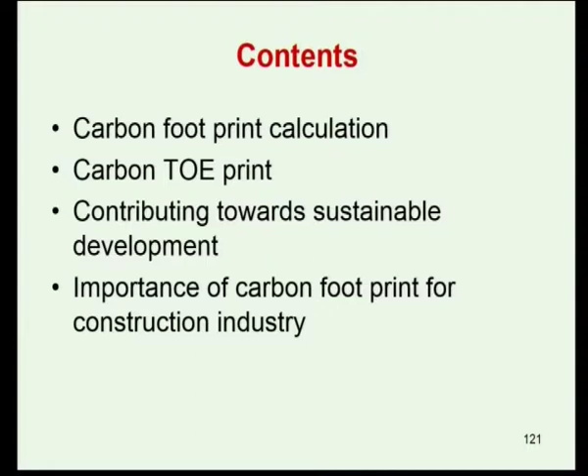The contents we are going to discuss are the following: carbon footprint calculation, how to calculate the carbon footprint; second, carbon toe print; third, contributing towards sustainable development; fourth, importance of carbon footprint, especially for the construction industry.

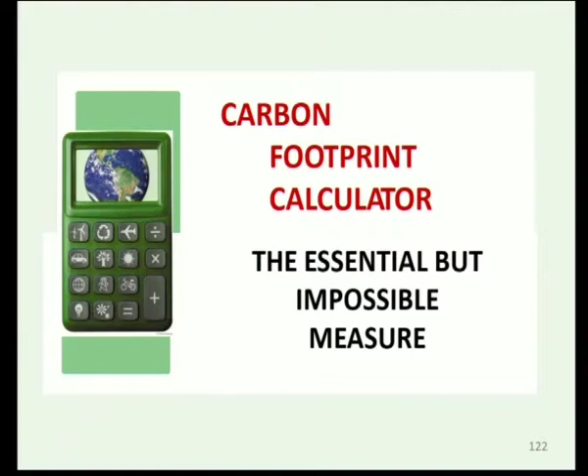The carbon footprint calculator is a very essential one, but it is not so easy to measure. We have to take into consideration several factors. The basic steps for calculating the carbon footprint for any organization: first and foremost, you have to establish the assessment boundaries - what boundary, or within that boundary, which building we are going to calculate the carbon footprint for. That is the first step.

Secondly, organizational and operational sources for the greenhouse gases. What are the various organizational factors which contribute to greenhouse gases, and the various operational factors which contribute to greenhouse gases - you have to list them out. Then thirdly, after listing, you have to collect the various data in connection with the organizational and operational factors.

Then the next step is calculation of emissions using appropriate emission factors, which are already available. Through that, we calculate the emissions using that factor. This has already been given in the standards for life cycle analysis, ISO 14044 and ISO 14040.

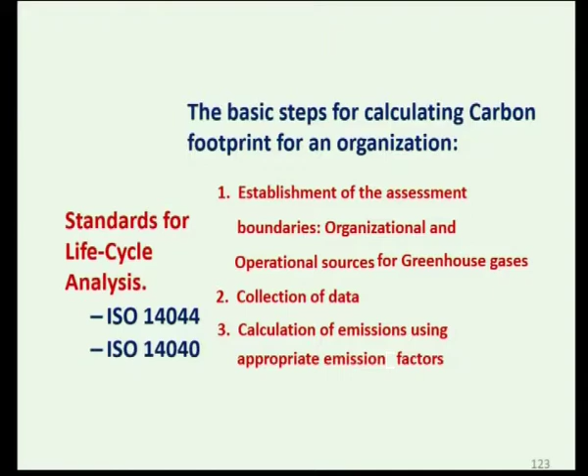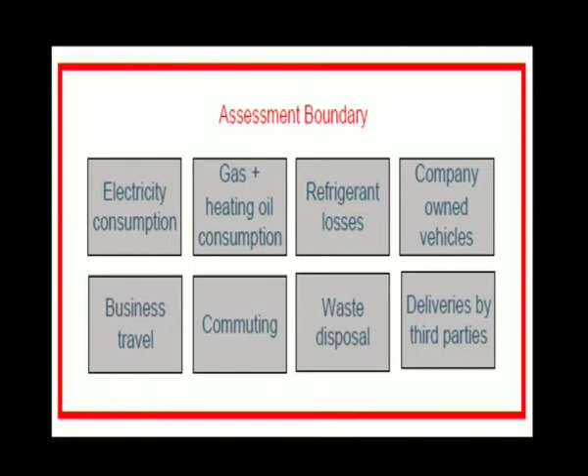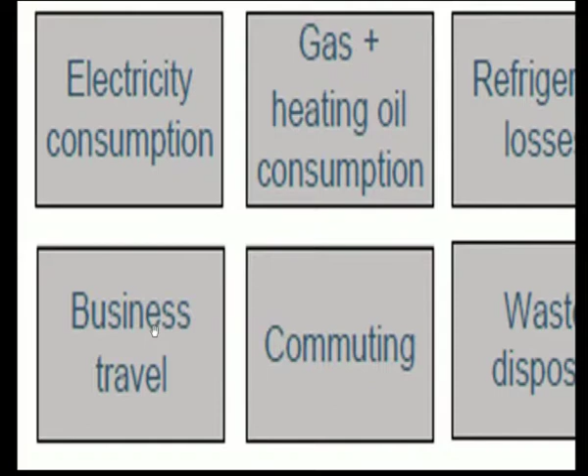So, in my previous slide, I spoke of the assessment of the boundaries. The assessment boundaries are the following: first, electricity consumption; then gas plus heating oil consumption; third, refrigerant losses; then company owned vehicles; then business travel, commuting, waste disposal, and delivery by third parties.

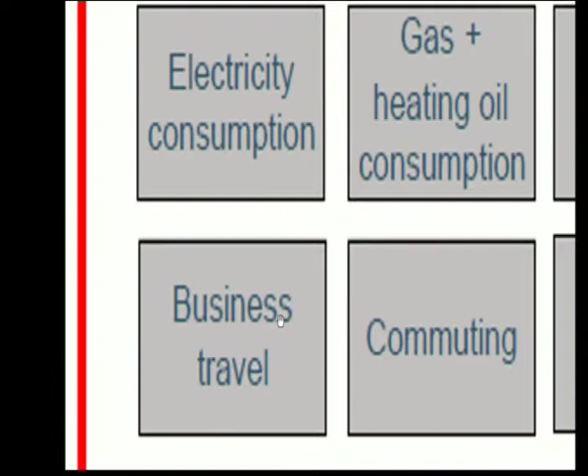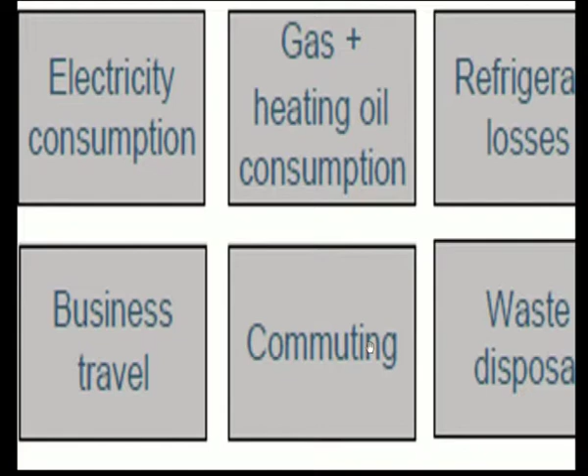Here, business travel refers to people coming to that industry for the purpose of various business. Commuting refers to employees who regularly come and go, which falls under this category. Of course, we know waste disposal, and then deliveries by third parties.

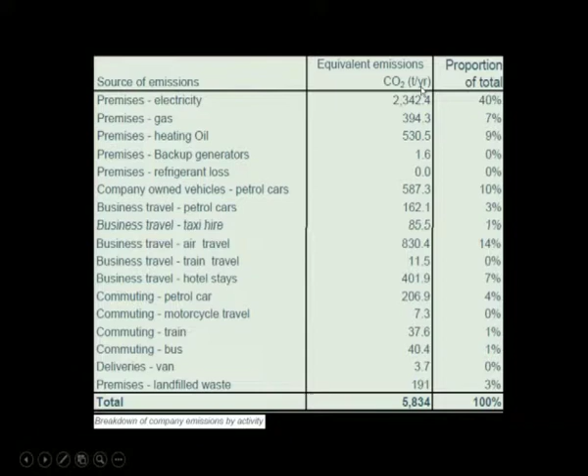This carbon footprint breakdown for a business with 5 offices shows the major contributor is premises, at around 59%, then company owned vehicles around 10%, business travel around 20%, commuting around 5%, and deliveries.

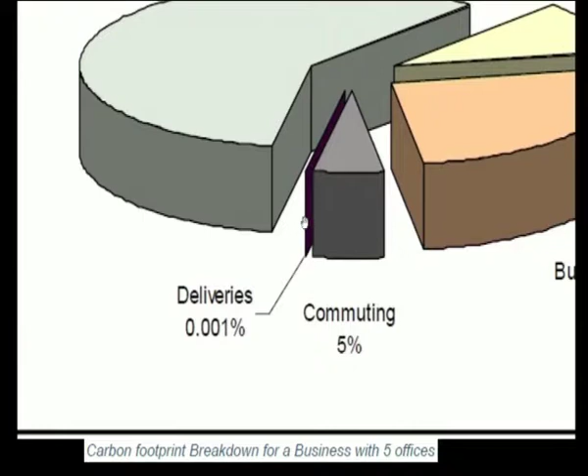Now you have to beware of carbon toe print. You should not get confused between carbon footprint and carbon toe print. What is a carbon toe print?

For example, a magazine publisher might claim to have measured its carbon footprint, but in doing so, he looked only at his office and cars, while ignoring the much greater emissions caused by the printing house that produces the magazine. In calculating the carbon footprint, he was only taking the activities inside the office and the cars, the transportation factors, but not taking into consideration the factors caused during the printing of the magazines.

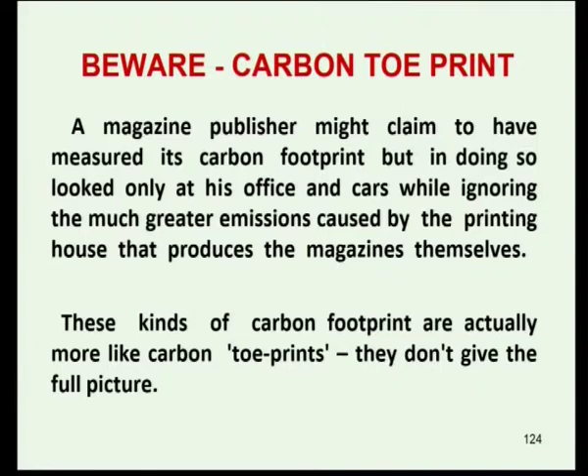This is what is called a carbon toe print. These kinds of carbon footprints are actually more like carbon toe prints. They don't give the full picture.

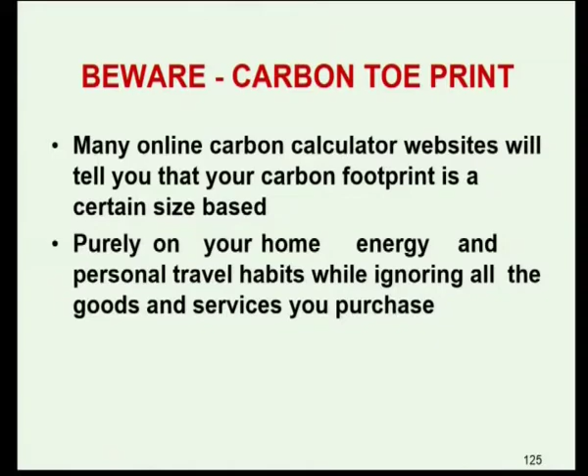Many online carbon calculator websites will tell you that your carbon footprint is a certain size based purely on your home energy and personal travel habits, while ignoring all the goods and services you purchase. So when calculating it, you should take these two factors into consideration as well, namely the goods and services which you are purchasing.

Much of the confusion around footprints comes down to the distinction between direct and indirect emissions. Direct emissions can be calculated very easily, but indirect emissions we have to assume and take several other factors into consideration.

The true carbon footprint of a plastic toy, for an industry manufacturing the toy, includes not only the direct emissions resulting from the manufacturing process. In the course of manufacturing, several factors contribute to carbon, and those can be listed out easily. But beyond the manufacturing process and the transportation of the toy to the shop, it includes a whole host of indirect emissions, such as those caused by the extraction and processing of the oil used to make the plastic in the first place.

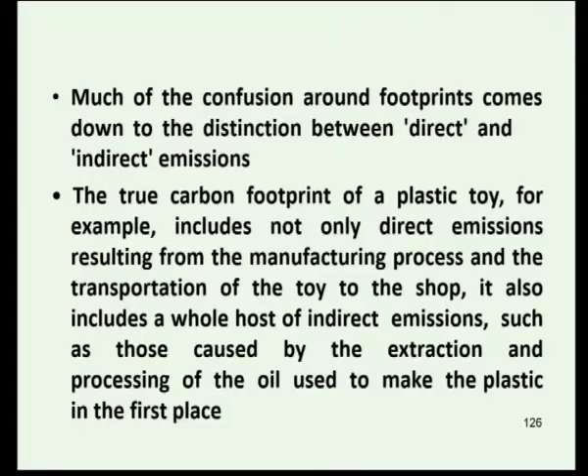To explain it very easily, it is nothing but a life cycle analysis. That is, in working it out, you account for all the various factors and find out, from the beginning to the end of the process, what quantum of emissions it is emitting. From that, you can very easily calculate the carbon footprint.

Then, contributing towards sustainable development. The definition of sustainable development is development which takes into consideration the present, without affecting the ability of the future generation, or development that must be within the carrying capacity of the environment.

What are the various factors contributing towards sustainable development? First, it helps identify low carbon project options that have the potential to make carbon savings during the design and construction phases. So first, we have to identify the various potential sources for carbon savings during the designing of the building and during the construction phase.

Second, carbon savings during a building's operational lifespan by promoting building energy efficiency and the use of renewable sources of energy. So whenever possible, we must try to go for renewable energy sources.

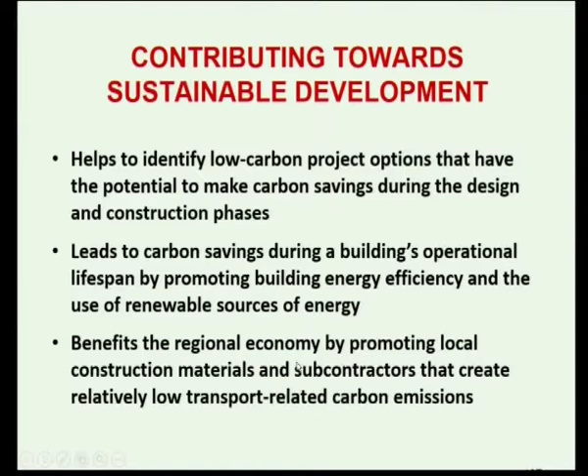Third, it benefits the regional economy. How does it benefit the regional economy? By promoting local construction materials and subcontractors that create relatively low transport related carbon emissions. When you are able to employ regional materials, or materials available in the vicinity, you can reduce a good amount of cost in transportation of materials. Secondly, you can employ local contractors. With all these, you can reduce carbon emissions.

Carbon conscious buildings should be designed according to sustainable urban planning in order to help reduce their lifetime carbon emissions. The results from a project's carbon footprint can also be used to benchmark performance and realize carbon reductions on similar projects in future.

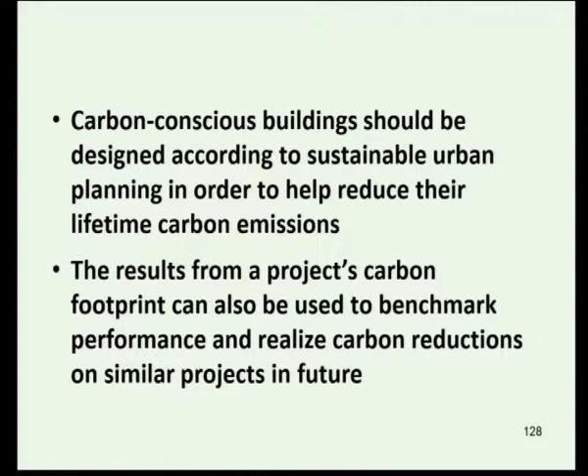Importance of carbon footprinting for the construction industry. We will see the social aspects and economic aspects, how it benefits.

First, with reference to the social aspects: project partner collaboration. Carbon footprinting involves close collaboration with the project clients, subcontractors, supply chain, and building occupants. You can see how close collaboration exists between the client, contractors, and a continuous picture of the supply chain management.

Secondly, it raises the knowledge and awareness of climate and sustainability issues within the project team, client, building occupants, and among the public in general. If you can build this kind of good knowledge and awareness between the team, client, and building occupants, and even among the public, you can get good project partner collaboration. This paves the way for the social aspects, and as a result you can reduce the carbon footprinting in the construction industry.

The next social aspect: construction produces long life buildings. Buildings must exist for at least more than 50 years, so accordingly we must plan and execute the project. This promotes long life buildings, as relatively longer lifespan design options may have smaller carbon footprints over their extended life. As the life is extended, there will be relatively a smaller carbon footprint it must leave. Only then can the building be considered a good building with reference to less carbon footprint.

Let us move to urban planning. In the case of sustainable urban planning, first and foremost, carbon conscious buildings should be designed according to sustainable urban planning. So when you are planning the urban area itself, you should plan buildings which are more carbon conscious, meaning these buildings must release less emissions and leave less carbon footprint.

Second, being located close to amenities and public transport provisions in order to avoid transport related carbon emissions during the building lifespan. In the process of building construction, as well as after the building is occupied, it should have all amenities close to its vicinity. As a result, we can provide better transport provisions so that we can avoid transport related carbon emissions during the building's lifespan, leaving a lesser amount of carbon footprint.

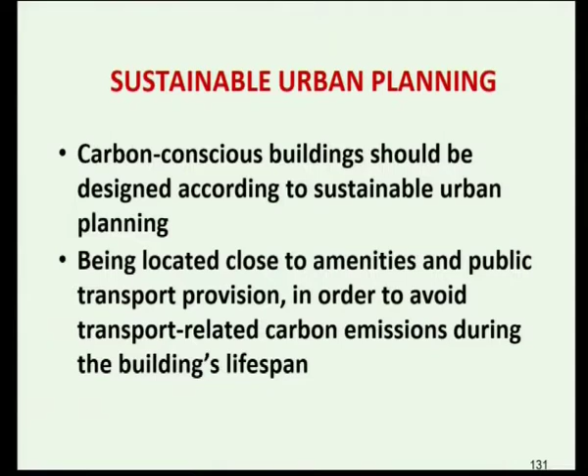Let us move to the economic aspects. It helps to identify regionally sourced materials that may have lower transport related emissions. Second, since we are using locally available materials, it will benefit the local economy.

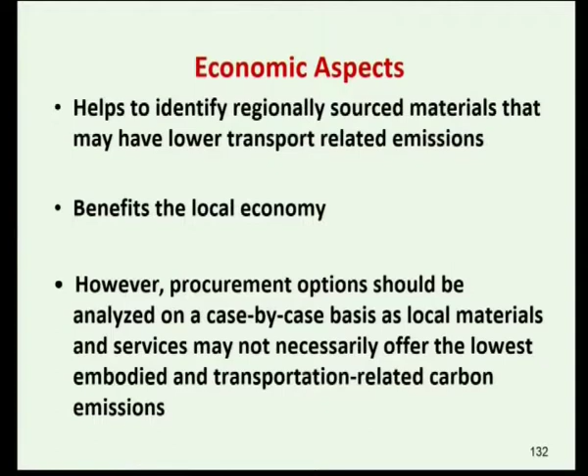Third, procurement options should be analyzed on a case by case basis, as local materials and services may not necessarily offer the lowest embodied and transportation related carbon emissions. So first and foremost, we have to give priority to the local option, but that does not mean local alone is supposed to be the good one. We have to analyze case by case, and wherever we can find lower emissions, that thing we have to give top priority.

Next, financial savings from reduced operational carbon emissions. Automatically, when the carbon emissions are reduced, it will save a good amount of finance, and as a result we can get more economic benefit.

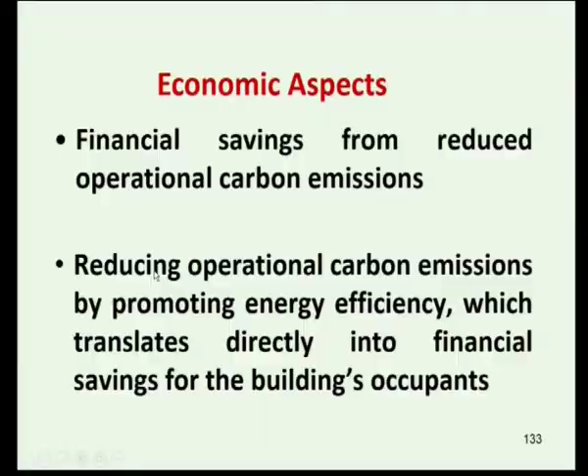Reducing operational carbon emissions by promoting energy efficiency translates directly into financial savings for the building's occupants. Whatever operational cost we are reducing in the carbon emission process will definitely benefit the building occupants financially.

Promoting cost efficient low carbon buildings: carbon footprinting techniques analyses can incorporate cost estimation, which can compare both economic and environmental cost and promote the delivery of cost efficient green buildings. Here, whatever environmental cost is directly involved, we can work it out.

Then secondly, whatever environmental cost is involved indirectly, we calculate that environmental cost converted into economic cost, then add these two together. As a result, you can get a total picture of the financial benefit you are getting. If that picture shows less carbon footprint, less emissions, and more energy efficiency, then that building can be considered a green building, or a cost efficient and cost effective green building.

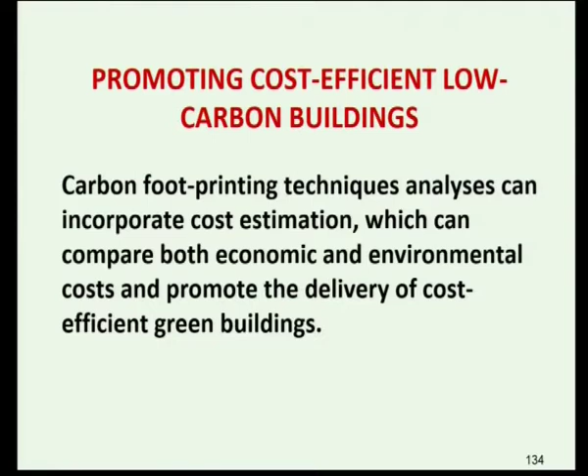Reducing environmental impact during construction: a building's carbon footprint includes carbon emissions related to the construction process. In the process of construction, there are lots of activities which take place, and those activities lead to emissions that include carbon, and that again contributes to the carbon footprint.

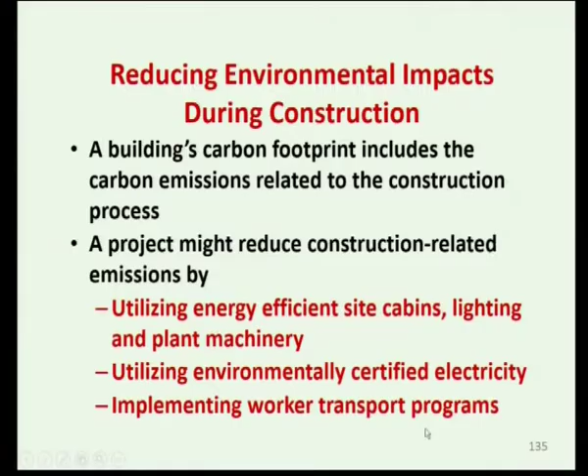In the process of construction, a project might reduce construction-related emissions. How? By utilizing energy efficient site cabins, lighting and plant machinery, utilizing environmentally certified electricity, and implementing worker transport programs. All these things reduce the carbon footprint or emissions during the process of construction.

Waste management is the most important. You have to find out what is the quantum of waste it generates, what are the characteristics of the waste, and how the waste can be minimized. And whatever waste is generated, which is unavoidable, we have to plan whether it can be recycled or reused, so that waste minimization happens.

Instead of going for end-of-pipe treatment, you have to integrate a process to reduce waste at the source itself, and wherever possible, manage and recycle the waste itself. Carbon footprinting can help calculate the life cycle carbon emissions from waste materials based on whether they were reused, recycled, incinerated or sent to landfill.

Footprinting can also help calculate the life cycle carbon emissions from the waste material. So we have to take into consideration whatever waste material is released, how you are going to treat it, reuse it, recycle it, whether you send it for incineration or landfill - you have to work out the life cycle carbon emissions from that, and take this factor into consideration.

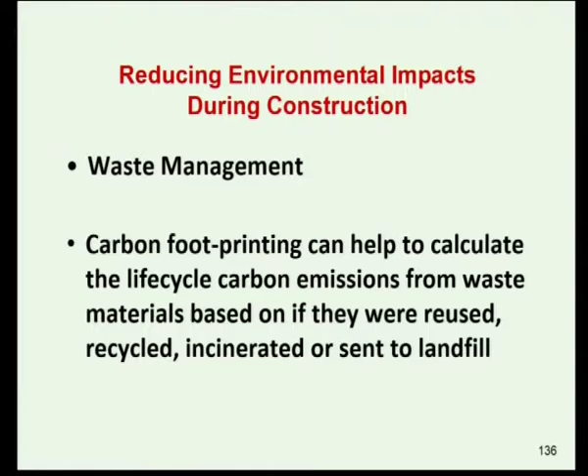Reducing environmental impact during construction: whenever we talk about environmental impact, we consider the construction phase and the operational phase. During the process of construction, first the waste streams, if effectively monitored, can help reduce emissions and reduce the carbon footprint.

Carbon mitigation efforts on future projects should focus on reducing the waste of materials - meaning wherever and whenever waste can be minimized, or how materials can be effectively used. Whatever waste is generated must be recycled as much as possible. On one hand reducing waste, on the other hand recycling the same waste, so we can reduce emissions to a large extent. This will also save energy and reduce the carbon footprint.

Operational energy efficiency means that in the process of operating a building, wherever possible, we have to use energy efficient sources. This includes not only non-renewable sources but renewable ones too, or we can move to alternative sources of energy. As a result, when efficiency is increased, it can significantly reduce the building's total carbon footprint.

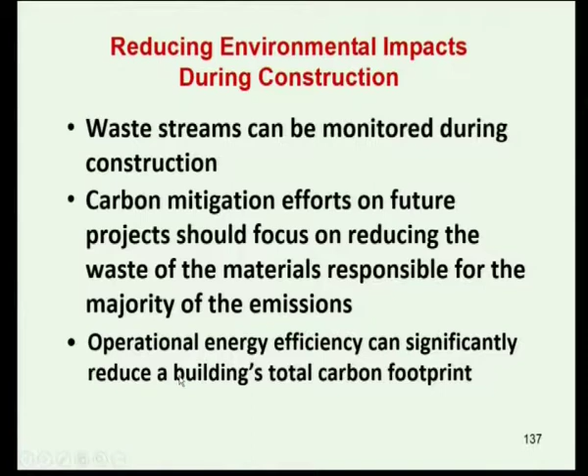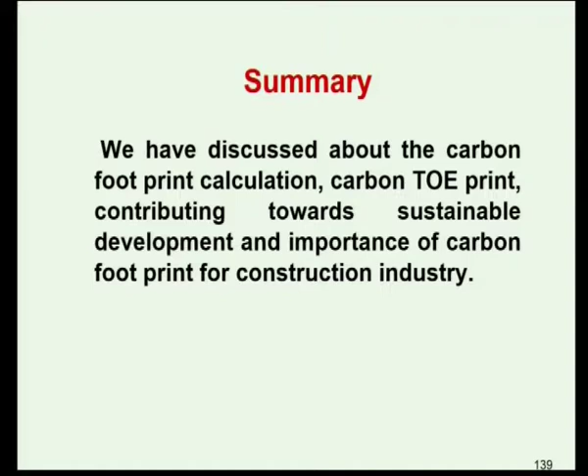My final point: reduce the carbon footprint. To summarize what we have discussed so far: we covered the carbon footprint, how to calculate it, what is a carbon footprint, its significance and importance, contributing towards sustainable development, and the importance of carbon footprint especially for the construction industry.

Shall we move to the questions? First question: what is a carbon footprint? Second question: how do you calculate the carbon footprint? Third question: explain the carbon footprint for the construction industry.